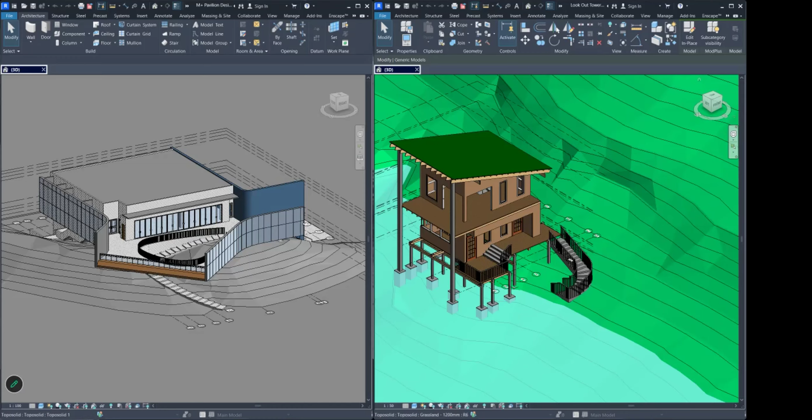We're going to talk a little bit about collaboration in Revit, because this is what we're going to be doing for part 2 of the assignment.

Yeah guys, I'm dealing with some heavy files today. So, what you're looking at here is the Snowdon project that we have been using in our presentation throughout the semester, right? And everybody had chosen a different topic. One of you had gotten the topic of collaboration - one of you had gotten that group. Remember, I told you that was going to be a part of what we do in this module.

Now, when we are collaborating in Revit, the idea with collaboration is that you can be in 3 different locations but work in the same project, right? And you guys that are in groups are going to be in different locations. I mean, we're online now - chances are you won't all be in the same physical space, but we're going to be able to work together.

Now, collaboration is going to be important because you're going to need this next semester. Next semester, when you do computing, you're going to have to work together in a group to do a set of drawings, and you're going to have to work collaboratively. I'm hoping that you guys will be the group that finally works collaboratively actually in Revit.

Because I think because we're all kind of learning Revit, sometimes when we're under the pressure of doing an actual project in Revit, we tend to default back to our old ways of working. So what I'm hoping is that when we learn collaboration, it is something that you not only do to secure your 30% now, but you will do next semester and hopefully when you go off into the working world.

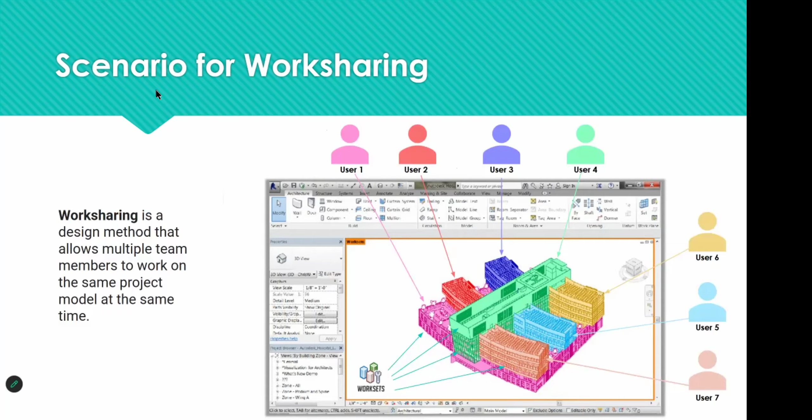Now, with our project, we are going to be using the file linking method. And if you look at the Snowdon project that we've been seeing here, this project is also using file linking. So for example, if you open the architectural part of the project and go to the 3D model, you'll notice that the context, if you click on it, is actually a linked file.

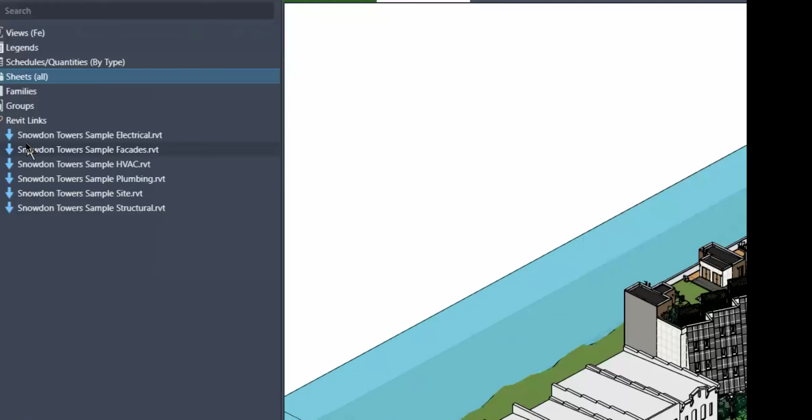So if I go to properties here - sorry, let's go to view - let's turn on the project browser. Let me put the project browser on this side so you can see clearly. So if I click on the context here, my project browser is telling me that I have the file called Snowdon Towers Sample Site linked into my project. So if I choose to unload this link...

...then I will have no context, because the context file is actually a separate Revit file. You can tell because you can see this is a .rvt file. So if I minimize this here, what you notice is that I have my... let's put this over here, and let's close the properties for now. So what you notice is that I have my site file right here.

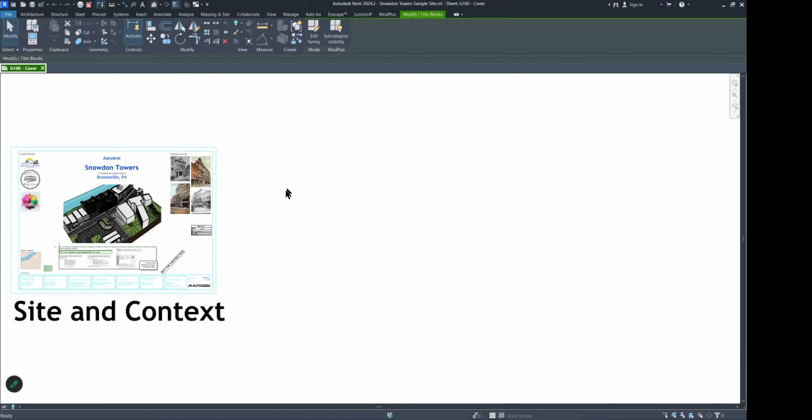So when I open the site file and go to the 3D view, you'll notice that in my site file, I can actually edit these objects.

If you look at my building here, my building is now a linked file in my site file. So the basic idea is that you have multiple Revit files, and then you merge those Revit files together to have one primary file. In this case, the person that lays out the furniture is doing it in their own file, and the person that does the mechanical and electrical is working in their own file.

So this is how we use Revit in the working world. The idea is it can be twofold. You can be in the office and you decide to work on a project together. You might say, alright, Abigail, you take the ground floor, and Okiri, you take the first floor. Both of you have two separate Revit files, but then you merge them together to create that final file.

Now we're going to be doing that, and what we're going to be doing is you're going to be divided into groups of 3. The first group is going to be the designer. The next group is going to be the family modeler, and the lead of the group is going to be the BIM coordinator. Now, how this is going to work is...

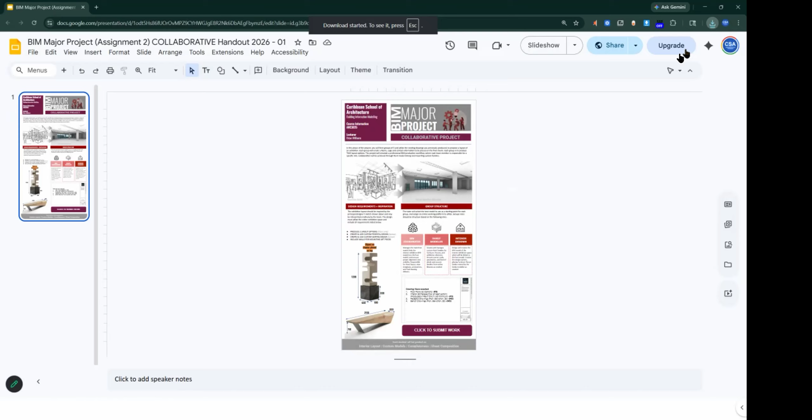Oh, I forget, I can't zoom presentation. Let me download this. There we go. There we go. All right.

Everyone can see my screen. For our collaborative project, you will form groups of 3 and utilize the existing drawings you previously produced to propose a layout of an exhibition. So this is that empty space that you have on the upper floor, right?

Each group will create a name, logo, contact information to be placed on your sheets, just like what you did before. Now, each group is to produce two options for the layout of this space here.

This project is basically simulating what is done in an architectural office when you have to share a project together, right? So each member is responsible for a specific role, and the collaboration is going to be done using file linking. So this is the space that should be on the interior of your model.

Now, I am going to be giving you, every group is going to get a starting model that I have produced. So you're not going to use the models that you created. You're going to use the model that I give you. It's the same M plus pavilion, but you're going to use my version of the model. That way everybody has the same starting point. All right.

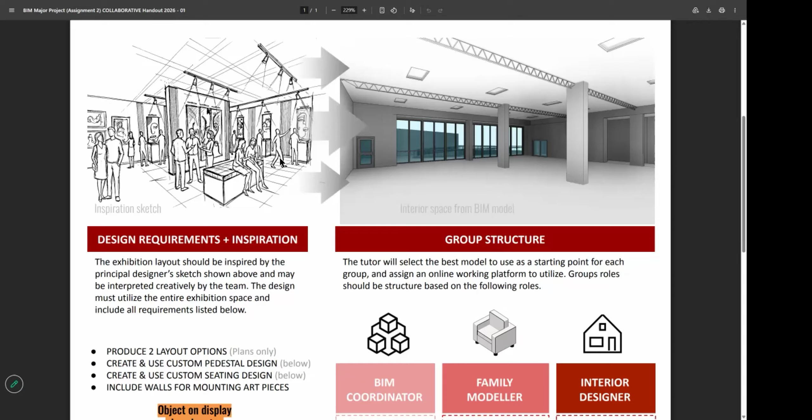Now skip down. There are three group members here, and we spoke about the interior designer. There's going to be somebody designated as the family modeler, meaning the person who will create the pedestal and the bench. The family modeler creates and manages the custom Revit families for furniture used in the exhibition, and ensures that the objects are modeled properly. This is what the pedestal looks like, and this is what the bench looks like. The family modeler is responsible for creating this object.

Now, when the family modeler creates this object, the interior designer is going to distribute the object throughout the floor plan, depending on what the design is.

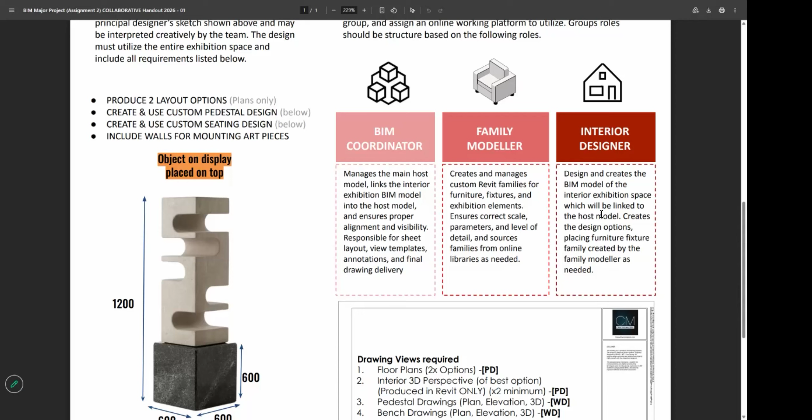The final role is going to be the BIM coordinator. The BIM coordinator is the person responsible for merging the interior designer's drawing into the main model. The BIM coordinator is also going to put them on sheets, add annotations, stuff like that.

You guys following me so far? Yes, thumbs up. Yes, cool. All right, cool.

So for this part of the project, I'm going to give you the model that you're going to use, basically the starting points. I have three folders to distribute: one folder goes to the BIM coordinator, another goes to the family modeler, and the third goes to the interior designer. All three of you are to work in those files that I've given you, so you're not creating your own files from scratch — you're going to use the file that I prepared for you.

Now, when you form a group, you need to store your files somewhere, so you're going to decide where you want to store your files. Go ahead, Gavin.

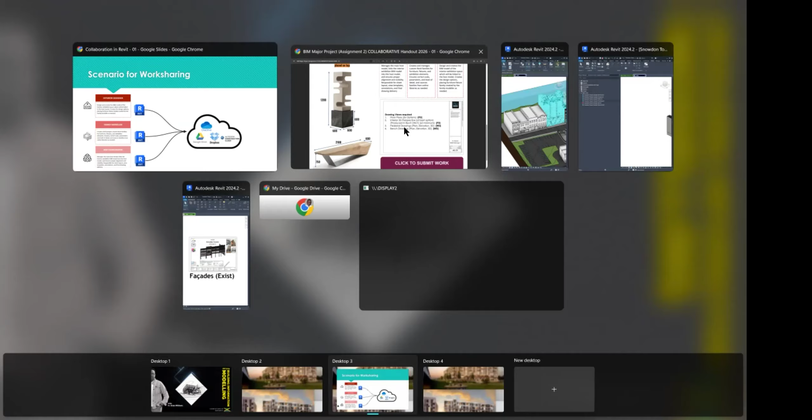Sir, question. Yeah, go ahead. You said we all have to be using the same version of Revit — I remember you mentioning using 2024. Is that the best one to use, or can we all use 26 or 25?

You can all use 26 or 25. I normally recommend 24 because it's the lowest — you can always go from low to high, but you can't go from high to low. So if I recommend 24 and you all use 24, and somebody's using 26, you can go up. But if I recommend 26 and for some reason 26 doesn't work on somebody's computer, you can't go down. So if somebody in your group has 26, then you all have to go up to 26 to be compatible.

Everybody, you're going to have a group grade and an individual grade. So if you look at the responsibilities, the BIM coordinator is going to put the model together and put the sheets together — that's 50% of your grade coming from. The family modeler is the one that's going to build these objects in Revit, so that's what your grade comes from.

The interior designer is going to create two layout options, so everybody is going to have their own Revit file, and you're all submitting your individual Revit files. However, the BIM coordinator's Revit file would be used to grade everybody, because the BIM coordinator is submitting the Revit file that includes everybody else's work and the PDF.

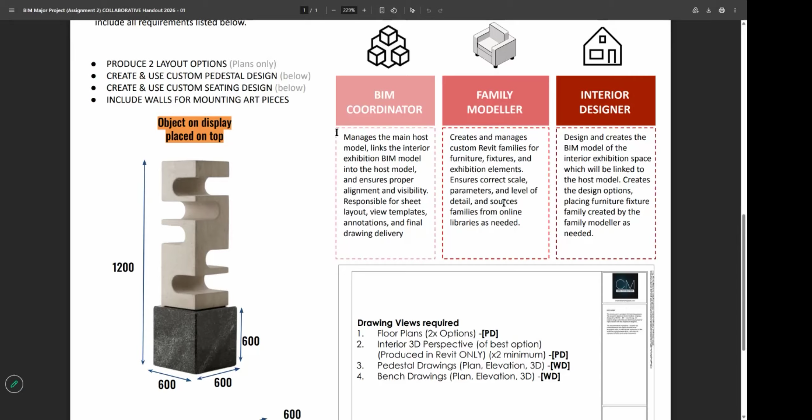Now, I'll be giving you two tutorials today. One of them is going to be on using the design options feature in Revit, and that's going to be especially for the persons doing the interior designer role. And the other tutorial is going to be on using the family editor.

Now, we did do some family modeling last year, right? This time we're going to do pretty much the same thing. Anybody remember what you modeled in the family model last year? Who remembers? What did you create? Anybody remember? No? The bench. Right, you created a bench. This time you're going to create another bench. Can you believe it, Abigail? Another bench. So excited.

Well, guess what the exciting thing is this time? We're going to be making a parametric object. So that is going to be the added thing that we do this semester, right? That means that this bench that we create, when it's in the model, you can adjust the sizing of it, right? Whereas last semester we only modeled it. So that's going to be the task of the family modeler, right? So that is the assignment in a nutshell.

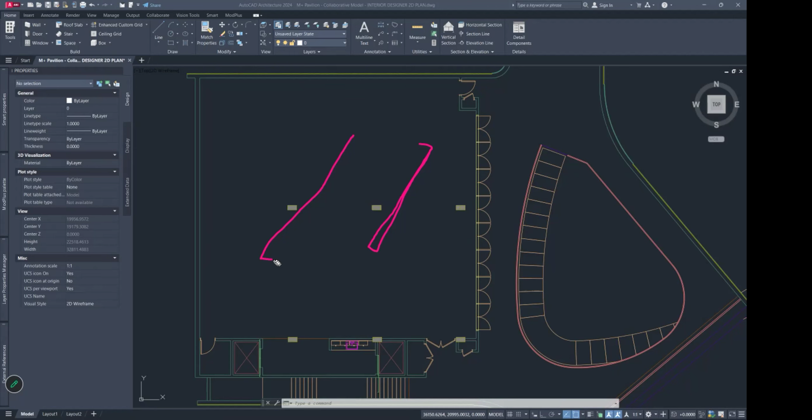You might decide to have a wall here, another wall here, and maybe a wall here, and then maybe pedestals in the middle. It's totally up to you how you want to design this space. Maybe you want to do it angular, like have the walls like this, and then walk through the space that way. Don't overcomplicate it, guys.

It's not about the design—well, yes, I am looking at the design because obviously the design has to work. It's a big empty space, and you have a bunch of art pieces to be displayed. So using that idea, you are architectural students. You can determine if you want pedestals on 4 sides, and then maybe a wall here. Totally up to you.

Now, remember interior design group, the pedestals that you use must be from the family modeler. Meaning, sure, in your design process you can put some boxes, and the boxes represent where the pedestals will be. But when you submit your work to me, in order for the group grade to work, I have to see all three pieces, all three parts come together.

Let's see, still on the designer. If you look in your folder, you're also going to have a Revit file. Now this Revit file is basically empty. Let me open it for you.

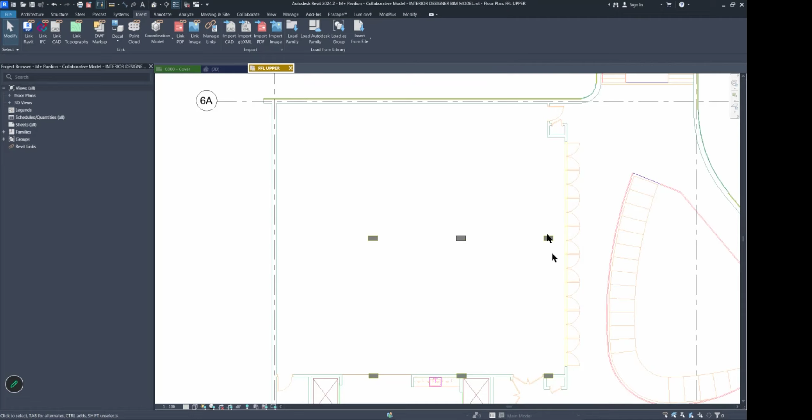If you want, you could also insert the CAD file that I've given you. You can also insert the CAD file—it should drop in place. There you go, and then you'll have the CAD file as a reference, and you can now draw your walls and everything. Now, of course, for the interior designer, there's no need for you to draw all of these exterior walls because they exist already.

So that's it for the interior designer. Now for the family modeler, your files—what you will have in your folder for the family modeler is going to be 2 RFA files. RFA is Revit family files. Now these files are going to be empty, of course, because you are going to create this object. So let me show you what your files look like. Here we go. So when you open these RFA files, they're going to be empty because they're basically just a furniture family file, and the objective now is that you would start to create the furniture in this file.

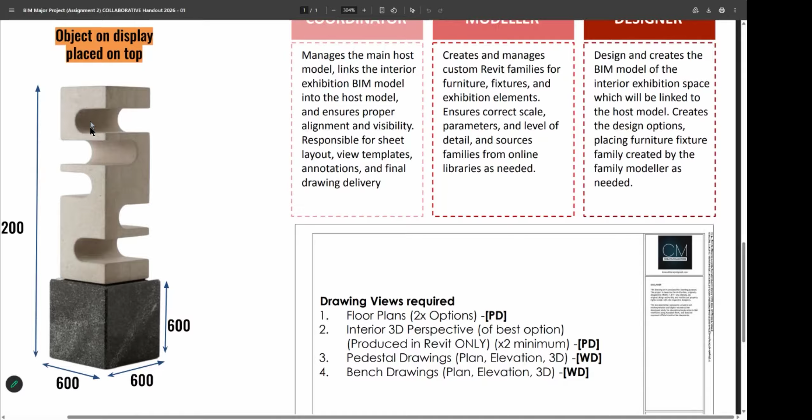Now, the furniture you're going to create is going to be this display. So the idea is that an object would be sitting on top of this and then create this bench here. So you have 2 objects to create. Now I'll give you an idea of how to create this one. This one, I'm going to leave you guys to figure out how you would model this. You know, just so it's not too boring for you.

Right, Joshua? Are you here, Joshua? Yes, sir. All right, cool. Oh, I should have taken questions.

Is there any questions for the interior designer role? So essentially for interior design, all I have to do is just import the AutoCAD and lay it out so that when you link the file, it lays out. Exactly, cool. Any questions for the family modeler? No? All right, cool.

The last role is going to be the BIM coordinator. Now, the BIM coordinator is going to be responsible for putting the model together. So in that folder, the BIM coordinator folder, you're just going to have a file of the project. So if I open this file up here, all you will have is a model of the building. Now, this is going to be a version of the model that I created. There are no sheets, there are no views, there are no elevations, nothing. There's nothing in this file but just the model. That's all there is to it.

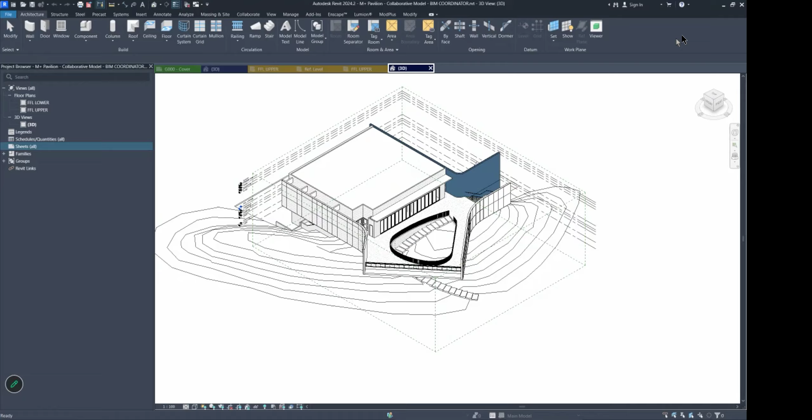And then you're going to create sheets for this interior design. Now, the sheets you're going to create is going to be based on what is on the handout. So keep an eye on the handout.

Where did it go? It's this one. Where did I put it? Man, if I closed it, I think. Right, it's going to be based on the handout. So,

BIM coordinator, you're responsible for giving me drawings for floor plans, 2 interior perspectives, the pedestal drawings, and the bench drawings. Now remember, as the BIM coordinator, you're basically putting the sheets together and putting annotations together. You're not responsible to create the design or create the objects.

Any questions for the BIM coordinator role? So, sir, so only 4 sheets or? Well, is it 4 sheets? However you want to lay it out, because floor plans, maybe 4 plans, maybe 1 will go on each sheet. You're pretty much using the same layout, same scale, everything that you did from the individual project. If you want to put 2 perspective views on 1 sheet, it's totally up to you. All right?

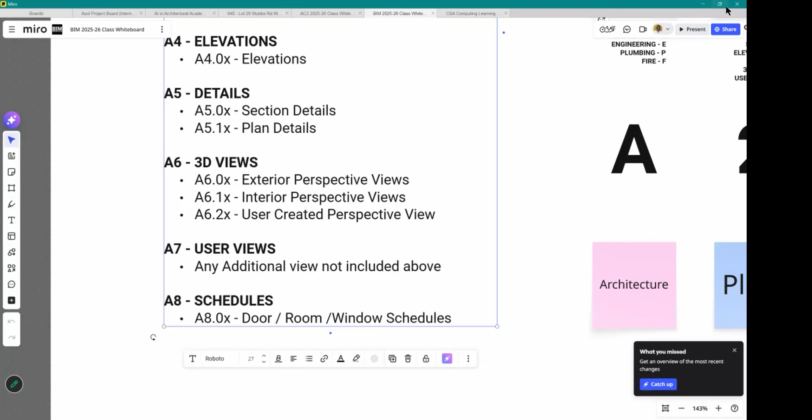So the BIM coordinator, yes, you will be marked individually, but how you put everything together affects the entire group. All right, so you have a little bit more weight on your shoulders. But you know how it is being a group leader. You're not necessarily doing any drawings, but you are putting the drawings, the hard work of your team members together, and delivering it appropriately. Any questions for the BIM coordinator?

Yeah, sir. I'm the BIM coordinator from my group, but I have 2 members already. Or are you choosing the members, or can I choose my members? You choose your own members. Okay, so it's totally up to you. Right, sir. I'm just going to provide the means by which I record the members, right? So we're going to just do it up on a form real quick.

All right. Now, before you guys go and before we do the groups, everybody here should learn about how we do design options and how we do family modeling, right? So just because a person may be doing the interior design, it is for everyone here to learn how to do it. So we're going to go through these 2 tutorials with everyone in the group.

All right. So, and then after the tutorials, I think you'll be a little bit more informed and you'll be like, okay, definitely I want to be the BIM, the family modeler. Or you might be, oh, hell no, I don't want to be the family modeler. I don't know how to use those things as good or whatever. All right, so we're going to take a look on 2 short tutorials.

We're going to do it the OG way, right? We're going to do it in class though, right? We're not going to be doing the whole app submit screenshot way, right? And then you can always refer back to this class recording if you want to view it again. Now, some of you already know this stuff already, right? But some of you don't. So my job is to make sure that everyone knows how. So we're gonna take a look on what do we have? So let's take a look on design options. These are pretty short, guys, like 15 minutes or less, I think. All right, so let's go.

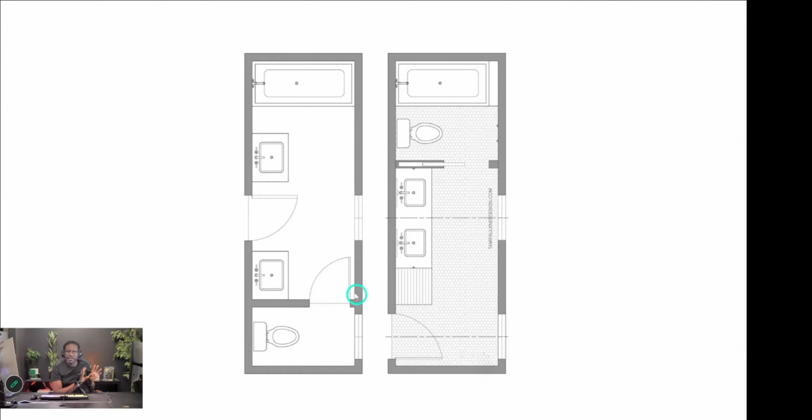Look at this example: we have 2 bathroom layouts. What I want to talk about is a feature in Revit that allows you to efficiently do different designs. Right away, I can tell you the incorrect way to do this is to do 2 separate floor plans side by side so you can see both—that's usually what's done. But when doing design options in BIM, there is a different approach that we use. So we're going to look at that now.

So we're going to head into Revit, and we have the space here that we intend to use. I'm going to bring this up here, and we're going to put this right here. What we're going to do is create the first option. I'm going to draw a wall that's going to be here—this is really simple, so you don't necessarily have to follow along, but you should remember how to do it for when you need it. And let's put in a door—a sliding door, the regular door, 36 inches wide, roughly there.

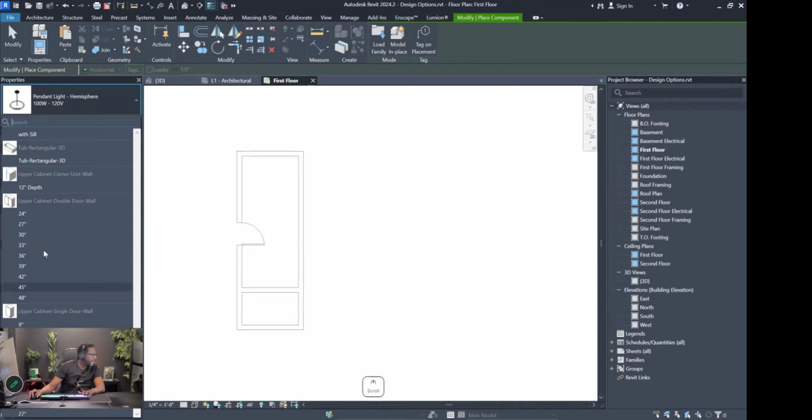Then we're going to put 2 sinks on each side. I'm using the residential template, so most of these things are already built in. I'll represent a sink here and one here, place the water closet there, and then place another door here. Oh, and let's not forget the tub—let's go back to component and place the tub, attached to a wall right about there. Now the tub is bigger, so we can change the width. The length of our room we'll make 7.5 feet, and we'll let the tub be 7.5 feet too—that's quite a big tub, but we just need it for this example. There we go, now the tub lines up exactly with the wall, which is fine just for representation purposes.

Now, let's say we want to create a different option, like what we see here in our plan. As I said, the incorrect way to do this—some of us would maybe duplicate this, copy it over here, and then start making changes, moving the doors so this door is down here and so on. But the idea is that this is not what you actually do.

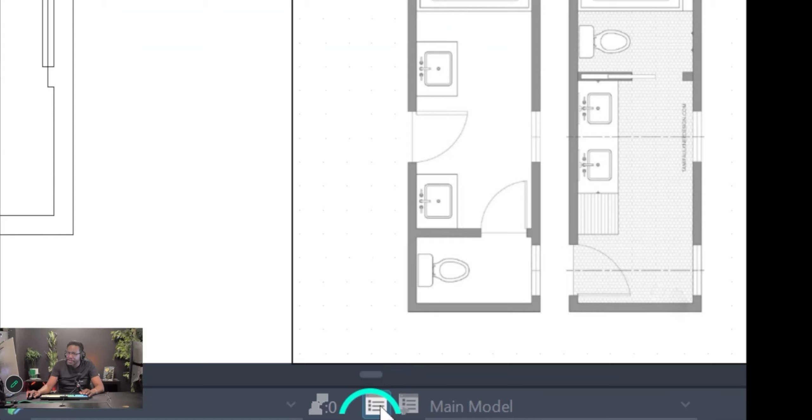In Revit, you have a feature called Design Options, which you find down here on your screen. How Design Options work is, let's say you have more than one design that you want to propose for the same space. What you would do is go to Design Options and say, okay, I want to create a set of designs.

So you create a set, and then you create options for that set. Let's create a new set here, and by default it calls this Option Set 1. You can rename this if you want. I can rename this to Bathroom Options, and this would be Option 1 for my bathroom options. Now Option 1 is my primary, which is what I'm seeing on the screen now.

Let's say I want to create an Option 2. So I'm going to choose New Option, and it's going to create Option 2. Now Option 2 is not the primary. So if I choose OK now, I'm going to choose Close. Now what you see down here is it's displaying the main model, and the main model is going to display the primary option. If I choose Option 2, everything is going to go gray, and I'm not going to see anything really.

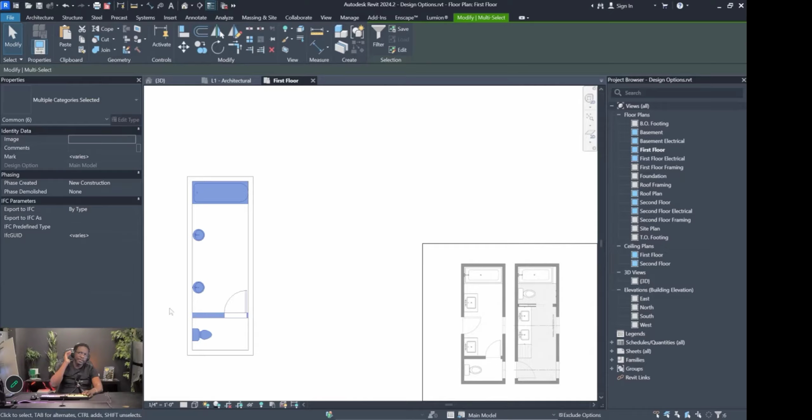Let's remove this door for now, and just speak about the items inside of the bathroom. These two sinks, this tub, this door, this wall here, all of these represent Option 1. So what that means is I need to move them from the base layer. I'm going to cut them, switch my model to Option 1, and then paste them—paste to same place here. So now these are on Option 1.

So if I go to Option 2, I won't see anything because this is Option 1. And if I go to the main model, then I'm going to see Option 1 because Option 1 is my primary option. Okay, so let me give you an example.

If I go to Option 2, I want the tub to be up here. So the tub is still up here in Option 2. However, my water closet is up here, so I'm going to place the water closet here—this is going to be here. Then I have a wall, that's going to be here. So this is Option 2 I'm looking at now.

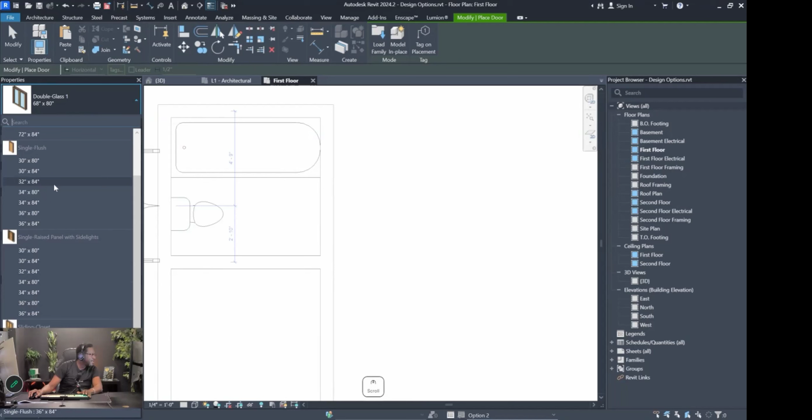And then I have a pocket door. So I'm going to just use a double sliding door. Let me just use a double—actually, I'm just going to use a single door here. Yeah, I'm just going to use this one. You know, this is just a test, not that you'd have these doors actually going into the bathroom.

And then I will have my sinks. So let's say that I have—let me find my base cabinets here. Okay, put a vanity here, another one here. So let's say this is my Option 2.

If I switch to Option 1, the inside will change, and if I switch to Option 2, it will change. If I go to my main model, it's going to show Option 1 because Option 1 is set to primary. So if I go to my Design Options and set Option 2 to primary, then—this is just showing me this error here, a relationship between bathroom options, but that's fine, I'm going to choose Done. So now my main model is showing Option 2. I can switch to Option 1; however, when I print my model, it's going to show me Option 2.

So this is how you do options in Revit, where you show different options by using the Design Options feature.

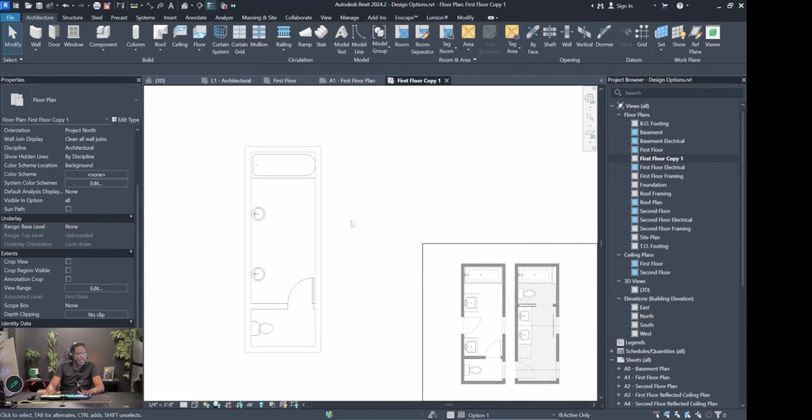Is you would create two plans. So for example, right now I have this that says first floor. I'm going to say first floor Option 1. Then I'm going to duplicate this plan and say first floor Option 2. Now I have one with Option 1 and one with Option 2. Right now, both of them are showing me the same options.

If I go to option 1, choose option 1 here, and go to option 2 and choose option 2, it doesn't keep it. This setting here changes it for the entire project.

So how you would go about doing this is you would have to use your visibility settings. What you would do is go into your view template, and let's say we want to use the view template architectural plan. So let's choose OK. So this is architectural plan here.

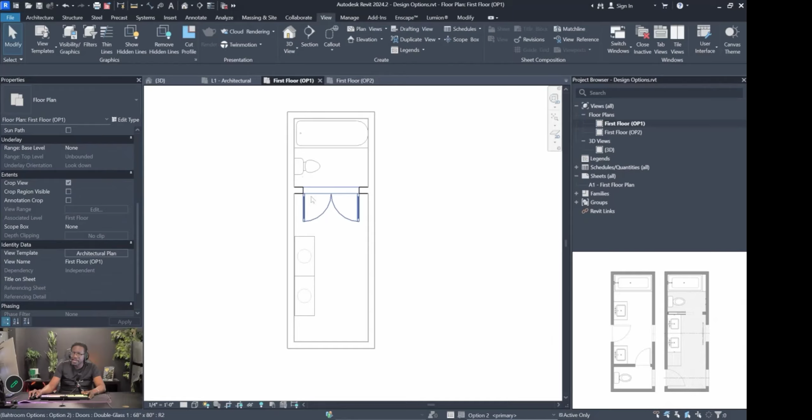So what we would do is duplicate this and just say option 1. So we created a new view template called option 1. And let's duplicate this again and call this option 2.

In the option 1 view template, we would go over to model settings, then to design options, and say for option 1 we want to show option 1. Then we go to option 2 and say for option 2, go to design options and say we want to show option 2, which is okay.

Now this drawing here is option 1 that we're in, so we're going to put it on option 1 and choose okay, and it will show us option 1. Then we go to option 2 floor plan, and we go to the view template and choose option 2. So now option 1 is showing option 1 and option 2 is showing option 2.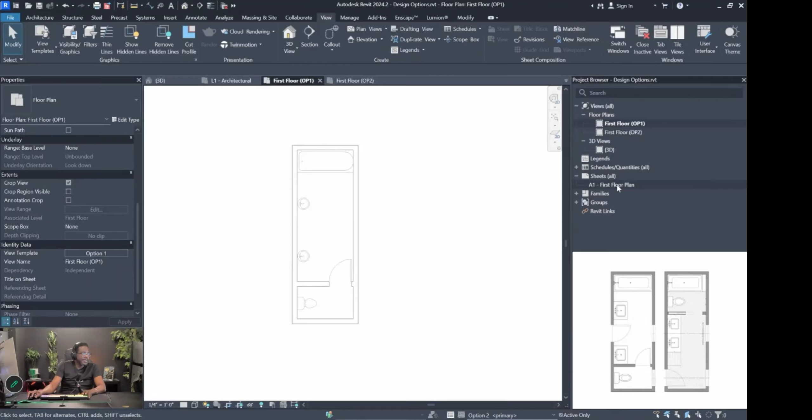The idea is we would put these two views on a sheet floor plan. So when we go to the sheet, we drag option 1 onto our floor plan, and then we drag option 2 onto our floor plan as well. Right now we are showing both options on the same drawing, and the great thing is that they are linked to the same drawing.

For example, if I went into my drawing, let's say I went to the first floor here, I'm going to go into my main model, and let's say I added a window. Now these windows that I'm adding are being added to the main model, not to option 1 or option 2. So what that means is that in both options I will see these windows.

Now it was giving me an error because I added the window where the wall is here, but the objective is that this is the efficient way to show design options in Revit. You create an option set, then you create different options for that option set, and you work within the option set.

Think of it like layers. Option 1 is a layer. You work within option 1. Anything you create in option 1 only is available when you switch to option 1. This makes it very efficient to show multiple design options using the same BIM model.

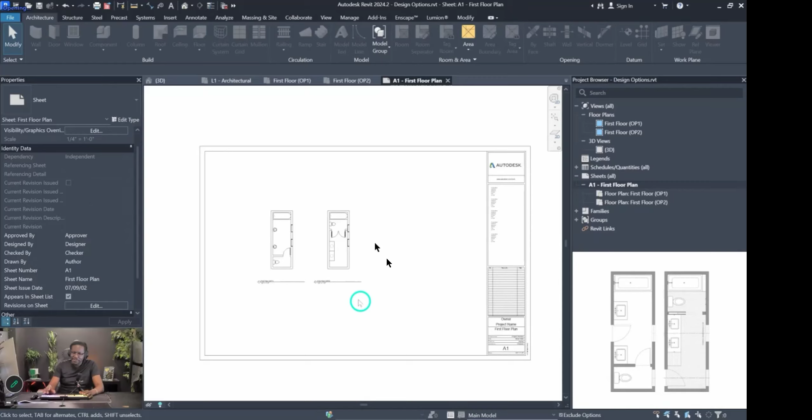So we're going to take a look at how we would go about building this furniture. Now in Revit, when we're building furniture, we build them as families. The idea is that Revit's workflow really works by, when you create these families, you insert them into your BIM model. So the families are actually separate from the BIM model. You create them and then you insert them in the BIM model.

When you really think about it, Revit is actually made up of two programs kind of merged together, and we call them modeling environments. Revit is divided into two modeling environments: there's the project modeling environment, where you build your building, and there's the family modeling environment, where you create objects to then insert into your BIM model.

In order to create objects, and these objects range from furniture to equipment to electronic equipment, communication equipment, whatever elements you intend to insert in your BIM model, you will need to create them in the family modeling environment. Now, the family modeling environment is subdivided into three modes: the family modeling environment, the conceptual mass modeling environment, and the in-place modeling environment.

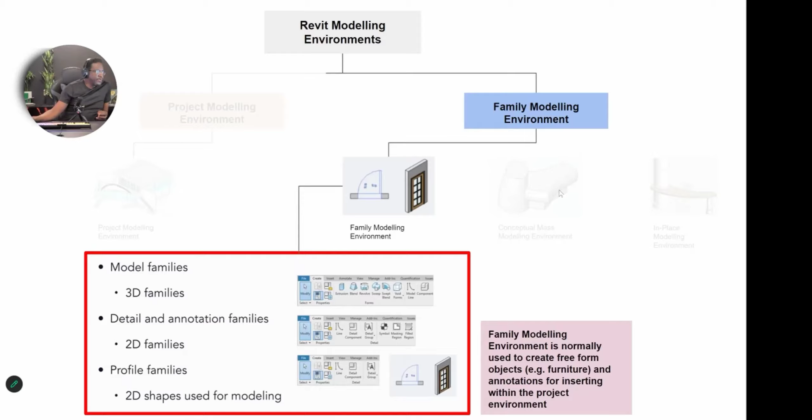They're used for different things. The main one is the family modeling environment, and that is used to create pretty much any object that you intend to put into Revit. This would involve everything relating to furniture and equipment. You use the family modeling environment to do this.

The conceptual mass modeling environment is normally used for building out conceptual models, usually done at the pre-design phase of a project. Different persons use different software and tools to do this. Some go old school with pen and paper and sketch their ideas. Some would use Google SketchUp to model their conceptual ideas. But Revit also provides you with a built-in way to conceptualize your ideas, using the conceptual mass modeling environment.

The last one is the in-place modeling environment, and this one is, I'd call it, a kind of quick and dirty way to create models. The reason I say that is you do not have to build this model in a separate file and then insert it in your project. The in-place modeling allows you to model within the environment. It's usually for when you want to make very unique elements, sometimes elements that do not repeat.

For example, if you were to create a table or a chair that will repeat throughout the whole project, you would not use the model-in-place environment. But let's say you wanted to create a small covering for a part of your model—like a unique corner you want to cover with a special type of design that you're only going to use once. That's when you would go into the in-place modeling environment. It's used as a kind of band-aid modeling—once an object is not going to be mass distributed, you would use the in-place modeling.

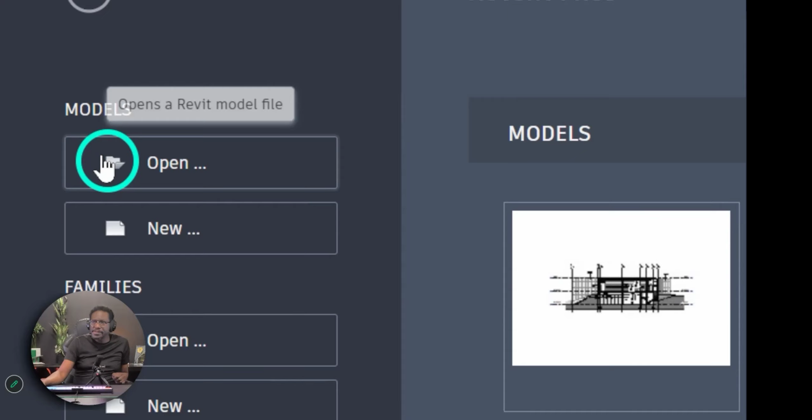Now, normally when you go into Revit, you notice these two headings here: Models and Families, and this is where you go into the different modes for using Revit. Models is where you go into the project modeling mode, and this is where you go to create your building. Under Families, this is where you go to create a new family.

So you would go to Families to create either an object in the family modeling environment or to create a conceptual mass. The model-in-place is not accessed from this menu here because, remember, the model-in-place is done within the project modeling environment.

So if we want to create an object that we intend to use throughout our projects—maybe even distribute it to the rest of our team members, creating a standard object used across many projects—then the best way to do that is to use the family modeling environment. This means when you go to Revit, you would need to go under Families, then go to New, to create a new family.

In our case, we want to create this unique bench, and the idea is that when we create it, we're going to place it in our model and distribute it. Because it's going to be used for distribution, we're going to use the family modeling environment. So we're going to go over to Revit, go to Families, and then go to New. Once you do that, you'll notice you're brought to this folder where you have a list of different family modeling templates.

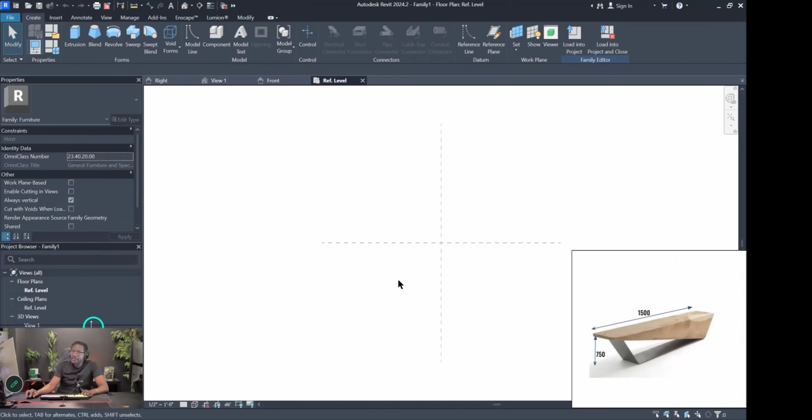Now, once you do that, you'll notice the template is now open, and it's going to look pretty much blank for now. Your family modeling environment looks a little different than the project modeling environment. Notice that at the top here, we have Create, Insert, Annotate - so our menus are a bit different.

Now, just to show you a comparison - if I was going to create a BIM model, I would go to Models and say create a new BIM model, and I'm just going to choose the default metric multidiscipline here. All right, there we go. So now I'm in my project, and I'm going to put this side by side. This would be my project environment here, and this would be my family modeling environment here.

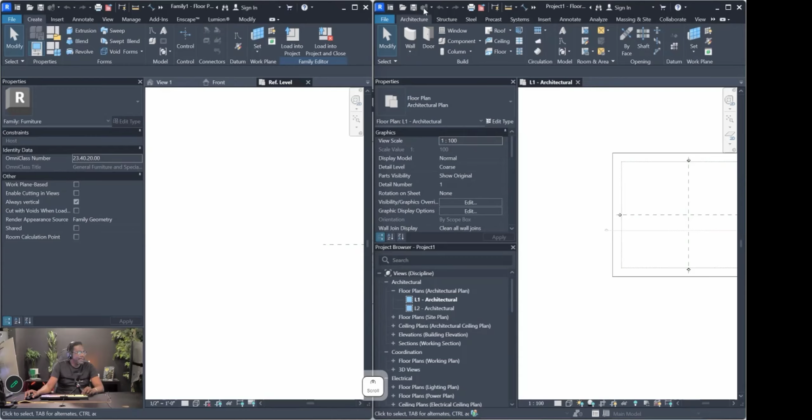Now, as I'm saying, Revit is basically divided into two modes. In the project modeling environment that you have here, for example, if I go to 3D here, I can draw a wall. I can do things like put in a door, put in windows - everything that you can do in your project modeling environment. Now, in your family modeling environment, firstly, notice there is no architecture tab at the top, right? So it's not made for you to do walls and windows and doors.

So for example, if I go to my 3D view here, it looks a lot different. Your tools in the family modeling environment are, for example, like extrude. So let's say I wanted to create a box - there's my box there, I'll choose OK, and I'm able to extrude the box. So this is an object that is in the family modeling environment. But on this side, we have architectural tools that are in the project modeling environment. The idea is that you create your objects here and then you insert them into this environment. So these are the two different modes that Revit has.

So if I was in the project modeling environment and wanted to create a custom shape that's not part of the architectural tools, I would need to first go into the family modeling environment, where I have tools such as extrude, revolve, and sweep. All of these tools allow me to model anything. Once I've modeled it, I insert it back into the project. That is really how Revit is meant for you to use the modeling environment.

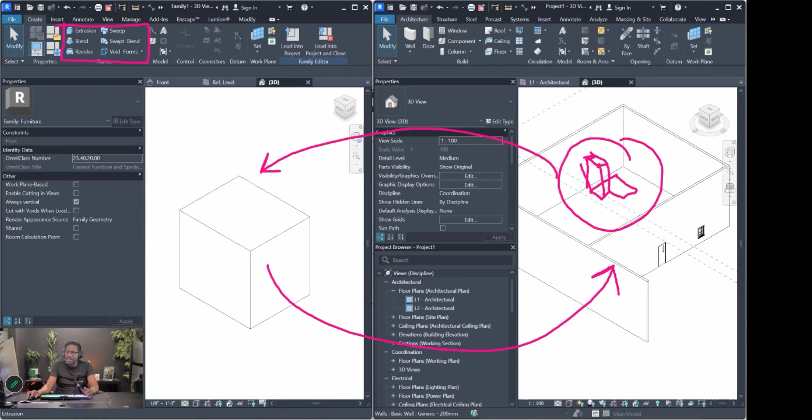Once it's here, I can duplicate this custom object many times, and all of them are linked to the same model. Now that we understand how that works, let's go back to our environment here. I will delete this box that's here. Now let's look back at this bench that we have.

When you're creating an object in the Revit family environment, think of it as using a modeling program, maybe like SketchUp, but with the additional ability to be parametric, meaning you can set up your model to change the height, width, and all of these options.

In the project modeling environment, if I click on this door, I can change the width of the door. Maybe I want it to be 900 millimeters, and then I'm able to change it. This door was created in the family modeling environment, built in a way to allow you to change parameters while in the project environment.

That is the difference when you create a model in Revit's family modeler—you're able to manipulate the model if you create it that way. On the flip side, if you inserted an object from SketchUp or some external source, you wouldn't be able to change things like height or width. That is the advantage of using the family modeling environment to create your objects.

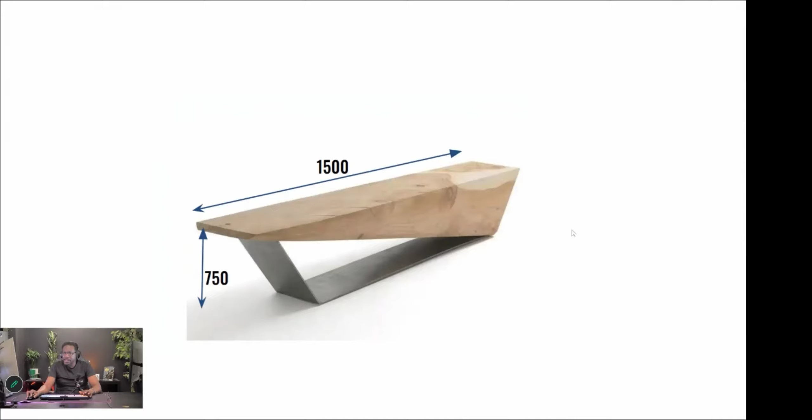So let's take a look at this object here. We have an overall measurement, and some measurements we'll probably need to estimate. If I was to create a strategy for making this object, I could look at this shape, and if I just think about that shape, then I could draw it.

Then I just extrude it this way, and I'd end up with a shape like that. For the bottom of the bench, I could draw another shape like that and extrude it that way again. This is how I could model this shape in the family modeling environment, and it would roughly end up matching the shape we have here. So now we have a game plan for creating this shape.

When you're in the family modeling environment, notice on your project browser—let me pull this out so we can see it. You also have a project browser in your family model environment, but it doesn't have things like sheets and schedules. It's meant for you to change your different views. Right now I'm in the 3D view, and I'm going to mount this on this side like that, so we'll have our project browser for our family here.

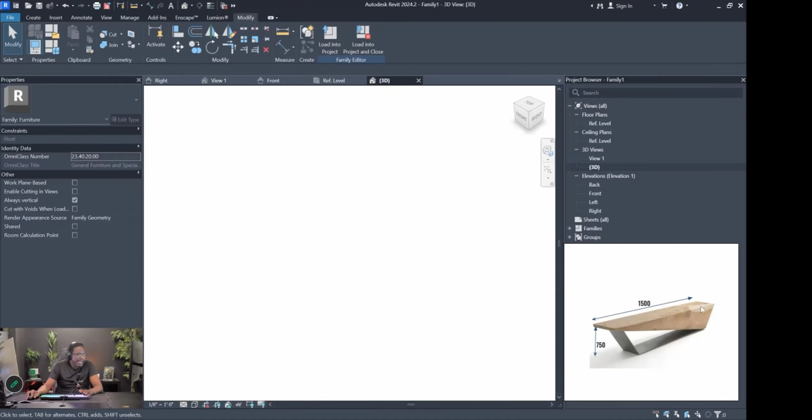Now, looking at this object, we have an idea of this shape, and our game plan was to draw it out first. If we're going to extrude this left to right, we need to draw this shape in our XZ axis. What do I mean by that? Well, I'm in the 3D view here now, right?

And if I think about my axis here, so this is my Z axis, and let's say this is my X and this is my Y here.

Now, the reason I'm saying this is that would mean that you would need to change your drawing plane to be X and Z, so that when you draw your shape here, then you can extrude it in the Y. So if you notice how that relates to our view cube here.

For example, if we were to draw the shape flat on the ground, so let's say like this, so we're now drawing in this face, then that would mean we would extrude it up on the Z, right? So it matters which drawing plane you're in in your family editor.

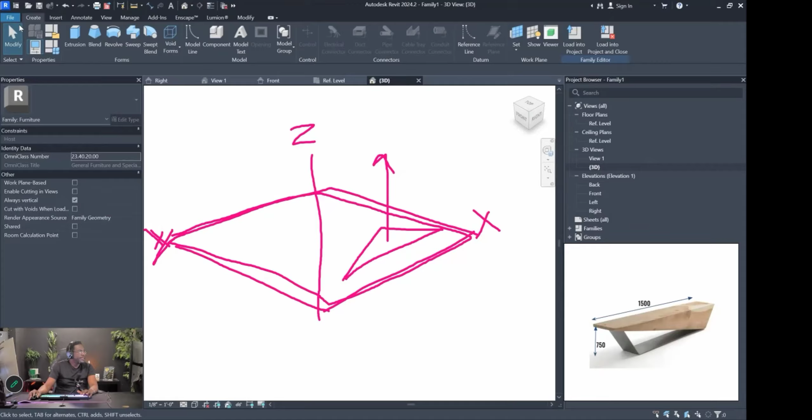And the way you choose your drawing planes is, under the create menu, notice you see a set plane here, just like in the project modeling environment. So you need to change what plane you're in, because that will determine how the object will extrude or be manipulated, right?

So right now, under my create menu, if I go to show my plane, this is where my plane is. So if I orbit this, notice you can look at my view cube here in the top right corner. This plane is pretty much flat.

So if I choose to draw a shape here, if I go to extrude and I choose to draw, I'm just going to draw a random shape here like that and choose OK, then I will be extruding up on the Z axis, as you can see here based on the view cube. And that's because my drawing plane is on the ground.

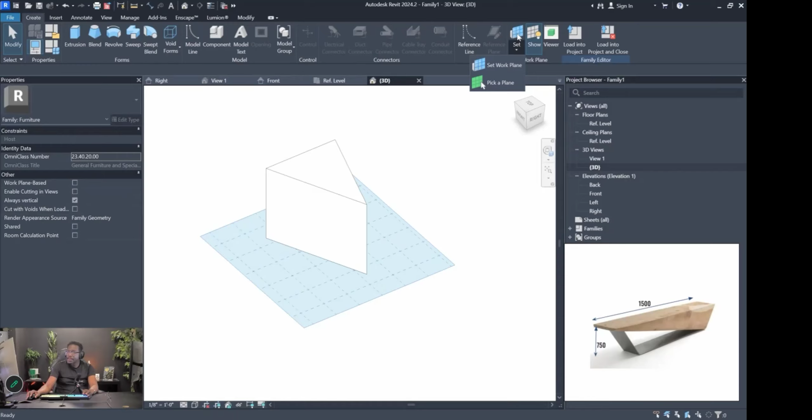Now, if I go back to create here and I go to set, and I click the little down arrow here, I can go to pick a plane or set a plane. So I'm going to go to set a plane here.

And let's say that I want to change my drawing plane. So I want to change it from a base level to, let's say, front back. Notice that my drawing plane will be here now. So I choose OK. If you look in reference to my object, my drawing plane is now on the front.

So now if I wanted to extrude a shape, I go to create and create a shape. This time I'm going to create a rectangle. It's going to be created like this. So if I choose OK, then I'm going to extrude this way.

And that would mean the base of my object would be here. For this object, the base was here. That's how I was able to extrude it up. So when you're in the family editor, what you need to do is actually be able to manipulate your plane, your work plane.

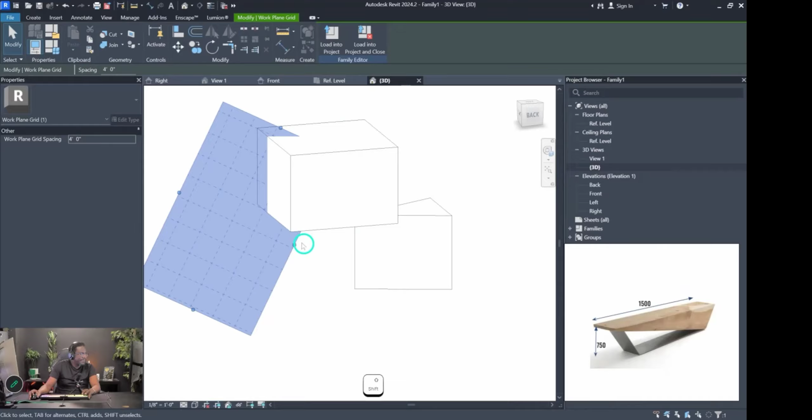Now, the other interesting thing about work planes is that I could go back to set plane, and this time I can go to pick a plane, and I can actually pick a plane on an existing object. So if I pick this plane here, then now the work plane is on this surface. Even though it's not previewing there, because I can extend this, you can see that the work plane is on this surface.

So now if I wanted to create an object, let's create another box. Now when I extrude, it's going to be extruded based on this plane.

Now, as you also notice, the plane was kind of lean, and my work plane is almost like an object that I can manipulate. So for example, I could just go to rotate here, and I could simply rotate my work plane, just like how I would rotate any object.

So I would put my marker here, for example, and I could rotate my object like that. So now if I draw a shape like that, it will be extruded based on this work plane.

So that is the foundation of how you work in the family editor. It is meant for you to be modeling using shapes and work planes, which is a little different than if you were in the project modeling environment.

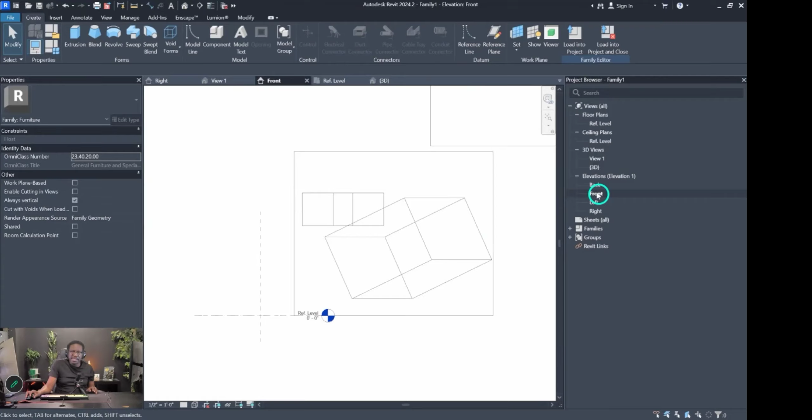Now, this is my 3D view here, and in my 3D view, I'm able to do things like manipulate my work plane. But I also have my different views that I have here. So for example, if I was to go to a front view, then what this means is that my work plane is automatically where I'm facing, meaning I'm not able to, for example, extrude something from top to bottom if my view is set to front. So on this front plane, the reason why you have these here is that you're able to now be a little bit more accurate than if you were in a 3D view.

So for example, I can go here and I can say extrusion again, and I'm going to draw another shape. Now in this view, it's almost like I'm drawing on a plan. Of course, I'm in a front view, plan would be more top. So this would kind of be more like an elevation. But once I'm in this view and I've drawn this like this and I choose OK, now, if I want to extrude the height of this, I'm not able to pull and push it because I'm looking dead on the front of this object.

So I can do that using my properties panel where I can set my extrusion start and extrusion end. Or I could just switch to my 3D view and there is my object right here and I can extrude it as well.

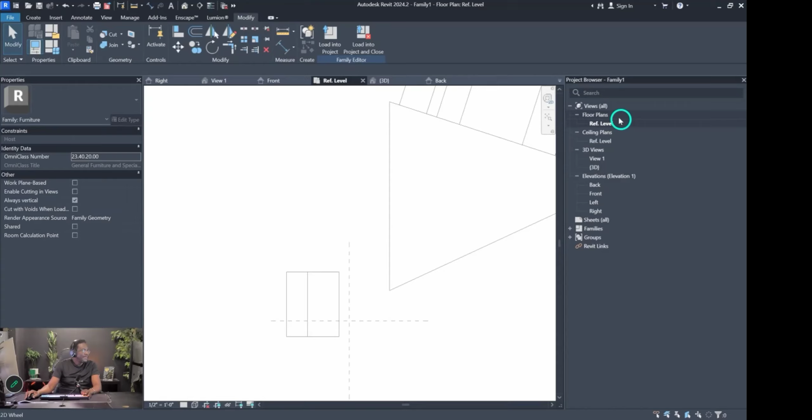So the other way that I can draw in the family editor is that I can draw in these individual views. So for example, if I wanted to draw top down, I would go into my floor plan view. So this is me looking top down, and I can also go left to right and so forth. If I wanted to have a kind of angled view, then what I would do is go to my 3D view, and then I can always use the picker work plane, and then I'm now able to change what my work plane is. But note, once I go into one of these views, my work plane is going to be automatically set to that view.

So now that we kind of understand how this works, I'm going to remove these objects here. And in my 3D view, I'm going to set my work plane. I'm going to set it to my level view. So what's going to happen is, when the work plane is set to your level, this is pretty much like a plan view, top down. So if I wanted to model this, I could go in, for example, let's say a front view here. And then what I'll be doing is that I will treat this here as my front. So translated here, I would probably draw this object something like that, and I'm drawing it in my front view. So then I can switch to a 3D view and extrude it if I want. So this will be how I choose to tackle this.

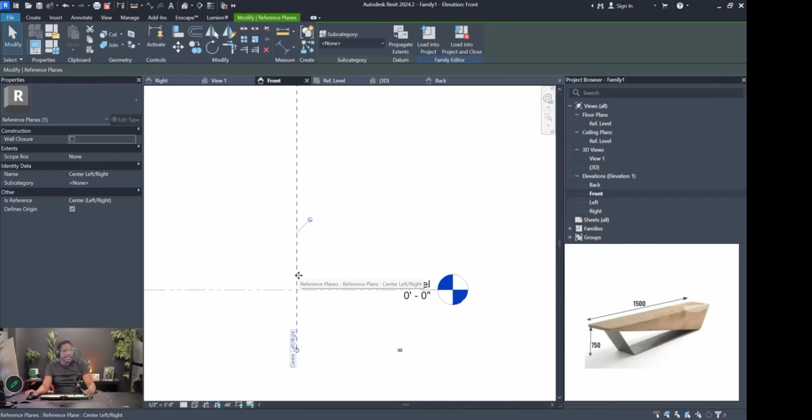So what I'm going to do is notice that when you go in your specific views, you get a reference plane and you also get a reference line. And this is why you would use these views and not necessarily a 3D view to start your model. When I'm in the floor plan view, I get this reference line here. So it gives me a center point for me to anchor my model. And when I'm in 3D view, I don't get this reference plane.

So the idea of the family model is that you're not trying to create photorealistic models. You're mainly trying to create a BIM model to represent what the actual model is going to be. So if we were in a more high-end program that is specifically for modeling photorealistic objects, say like 3D Studio Max or Maya, the focus is not on representing objects to put in your architectural drawings. That focus would be to create highly detailed photorealistic models. In our family modeling environment, the objective is to create a simplified representation of our model because we're going to put it in architectural drawings. So it doesn't require that photorealistic approach where you zoom into the tiny details to model. So keep that in mind whenever you're making your Revit family models. It is really a representation of the model. So with that said, if we look on this model here, there are little things like breaks in the wood.

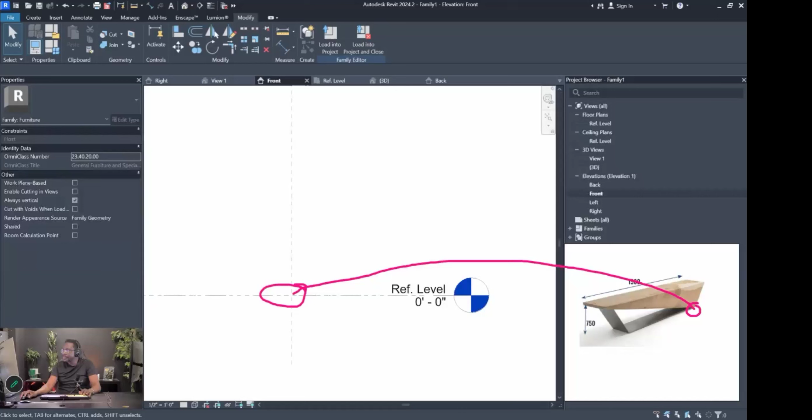So now, when you're in the family editor, I have determined that I want to use an extrusion. I could go to extrusion and just start to draw this out, like that, and start to draw out my extrusion. Then of course I would need to make sure these dimensions are correct - the length here should be 1,500 and so forth.

But usually when you're in the family editor, what you want to do is set up construction or guidelines before you actually start modeling. Because remember, the objective of the family editor is to accurately represent the furniture. So rather than just drawing a shape and extruding it, I'd recommend using reference lines or reference planes to give you a guideline for how to draw your model. I'll give you an example.

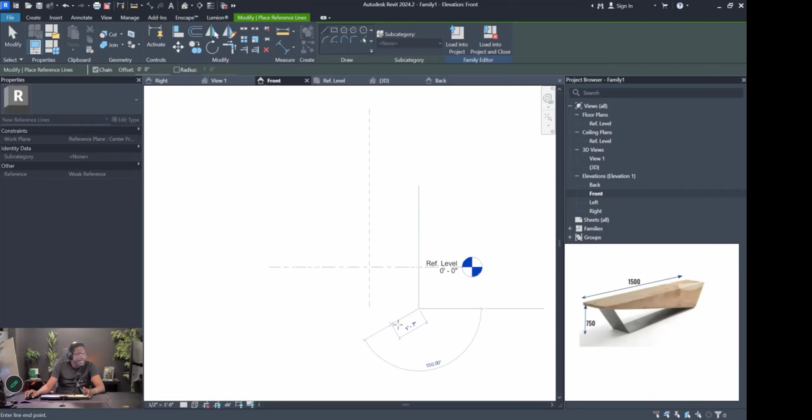Now, currently in the object we have here, we know that this is 1,500. So I'm going to draw a reference line here. A reference plane is just like a guideline - it's not an actual object that exists in your scene. This line here represents one end of the bench. Then I'm going to copy this, using a reference plane, over here, and say 1,500 millimeters.

Now, one thing to notice is that when I created my family file - let me go back and show you - when I chose new, and when I created my family and selected furniture, I am currently in the English Imperial folder. This is why, modeling here in this view, most of my dimensions are in feet and inches. I could also do this in metric, but then I would need to go into the metric version.

Not that it really matters, because you can actually type in imperial or metric measurements. But where it does matter is that when you insert it into your project: if you created it in an imperial family modeling environment, then that furniture's parameters and properties will all be based on imperial.

So because we are doing this drawing in metric, I'm going to close this file without saving, and go back again to create a new family file. But this time I'm going to go to English - you'll see English Imperial and English. English means metric, and English Imperial is feet and inches. So I'll go here to furniture again, and choose open.

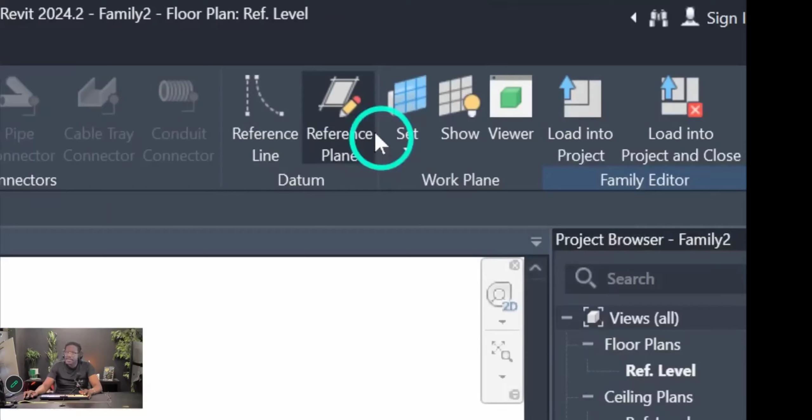It's going to look the exact same way, but the difference is - let me go for my reference plane again - when I draw this, notice that it's going to be in millimeters. Now, something you can also recognize is that you have reference plane and reference line, and both of them are referencing objects, meaning that this line you're drawing doesn't really exist. It's just there as a kind of guideline.

Previously I was using a reference line. So if you draw a reference line, this is what it looks like - it's usually a straight line. And if I draw a reference plane, this is what it looks like. The reference plane is dashed.

Now you'll notice that these lines you see here, already in your template, those are reference planes. If you click on them, you'll notice that they're actually pinned, so if I try to delete it, it won't delete. The objective of that is that it tells you where the center of your drawing is. So the idea is that you don't delete these reference planes.

Now, reference lines work similar, but they have additional features that you would use whenever you're setting up your parameters. Parameters, for example, is what I showed you earlier when I'm able to change the width of a door, or change the height of a door when I'm in the project environment. You use reference planes and reference lines to set up those parameters.

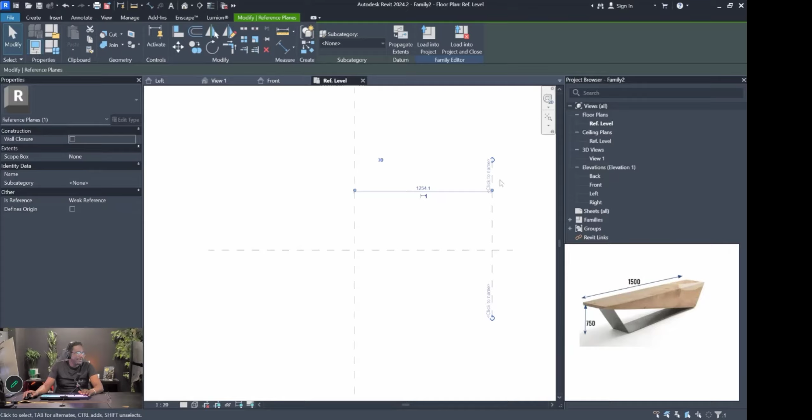Now, in our case, we're going to be using a reference plane. Notice with reference planes, you can even name them. So I'm going to put a reference plane here, and that is going to represent this side of my object. And then I'm going to copy it 1,500 millimeters here, so now this is the full length of my bench.

Now I also want the height. My reference level, this is my floor plan, so I'm actually looking top down on the bench. But remember, the idea is that I want to be in my front view, because my intention is that I want this here to be my front view. So I need to go into my front view and then draw my bench like that. If I go into my plan view and draw my bench, then the bench will be turned on its side.

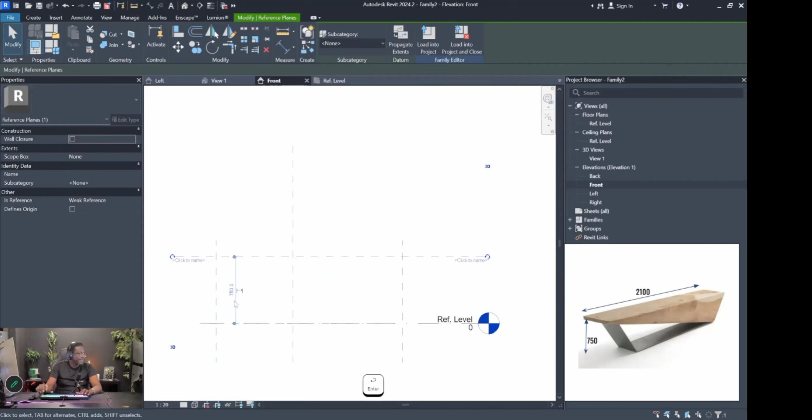Let me go back to my front view here, and I'm going to go to reference plane. I'm going to put my first line here, and I know my next line needs to be 2100, so I'm going to copy that over 2100. There we go. Then I know I want it to be 750 in terms of the height, so I'm going to go to reference plane again, draw this, and set it to 750. So the idea is that I've drawn a reference plane at this point, one at this point, and one here, and my reference level is going to be here.

So when I translate that here, my bench would roughly sit something like that. This is the reason why you draw reference planes, because it helps you to formulate how you're going to create your model. And this is how I chose to do it.

Now, there's something interesting here. If I go to my 3D view, notice that I'm not seeing anything, which is fine, and the reason you're not seeing anything is because reference planes, they don't exist — they're not a three-dimensional object. So let's go back to our front view here.

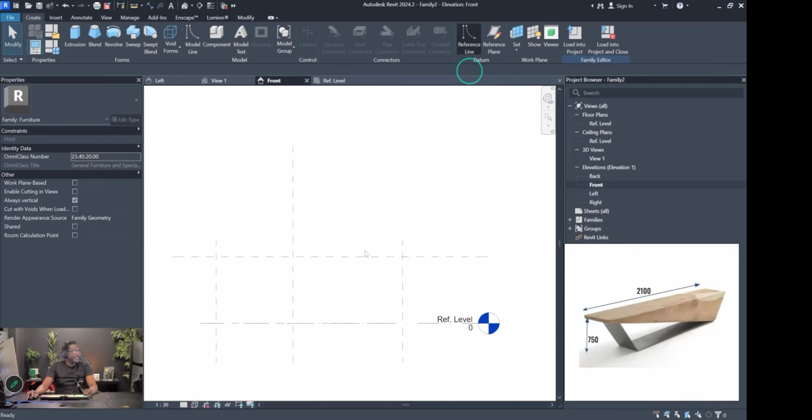Now we need to determine what this slope will be. So what I would do is use a reference plane and draw something. Let's go back here, reference plane — I want to use a reference plane and draw this like that, and draw this like that, so I know that this is what my object would be. And then maybe I want this to come down a little bit more, so I could go to create reference plane, carry this about here, and then draw another one like this.

So usually when you're modeling, what you're trying to do is, before you invest in creating the extrusion, you create guidelines to determine whether this is the way you want your model to look. One reason we're doing that is because we don't have all the measurements for this model — some measurements we're actually estimating. So I feel comfortable using a kind of guideline to first hash out how my model will be drawn.

All right, so now that I have this, I can go to create and go to extrusion, and I'll just trace these lines here like that, and choose OK. Now if I look in 3D view, I will start to see my object. I'm just going to choose view extents — so here's my object.

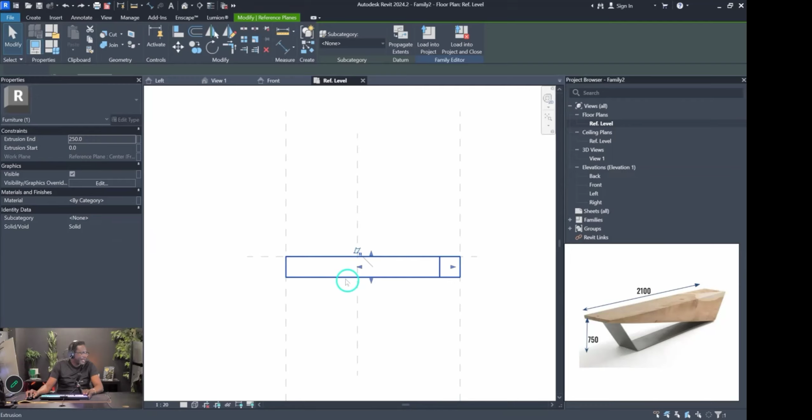Now, what I can do is adjust my extrusion length, which is this. As I move this, keep an eye on the extrusion start and extrusion end. So if I go this way, this is my extrusion end. If I look at my plan view here, you can see that this line and this line are my original lines, so I can extend this like this, or I could actually put in the thickness — how thick this is going to be.

Based on our drawing, this should be 600 millimeters wide. So I'll just go here and say 600, enter, and that's going to be 600 there. So this is the plan view, this is my front view here, and then my 3D view is going to be this.

All right, so I have this basic shape. Now I need to do this bottom part that's going to be here. So I'm going to go back to my front view like that, and for this, I'll just go straight to extrusion.

I'm going to take a piece down like this and across like this. Notice that this is showing the lines thick. I can always turn on my thin lines so you see the thin version, but sometimes if I want to see the lines clearly, I will use the thick lines. So there we go.

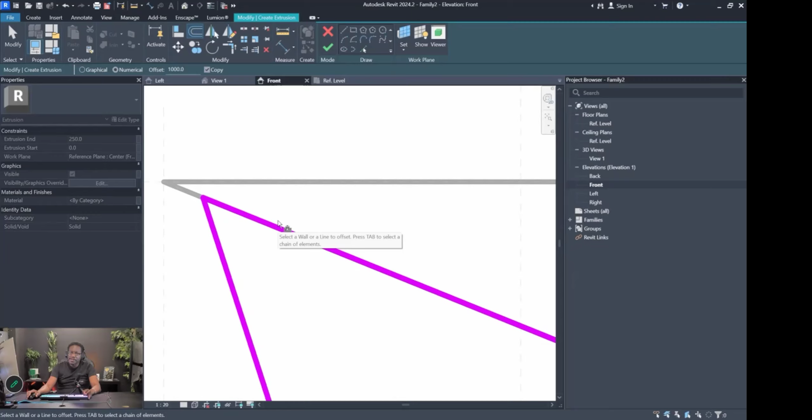Then I'm going to draw one up like this, and I'm actually going to use my offset tool here. The thickness that I want to make this is going to be about 15 millimeters. I'm going to go 15, so my offset is 15. So there I go, I have an offset there. So this is going to be my shape here, and I'm going to choose OK.

Now if I look at this in 3D, and I'll just turn off thickness so you can see it, you'll see this is what I'm seeing here. Now, based on my sketch, this is about somewhere in the center of my shape here, so I would need to adjust my start and end extrusion, something like that.

But to get it accurate, I will go to my reference plane. Then I'll take a reference plane, and I can just copy this reference plane, so I'm going to go to CO. I'm going to copy this and make this about 70 millimeters offset. Then I'm going to go and create another reference plane about here, and offset that the same 70 millimeters.

So now what I'll do is adjust this to land here. So when I look in my 3D view, this is what I will see. Notice I don't see my reference planes, but I see my 3D object.

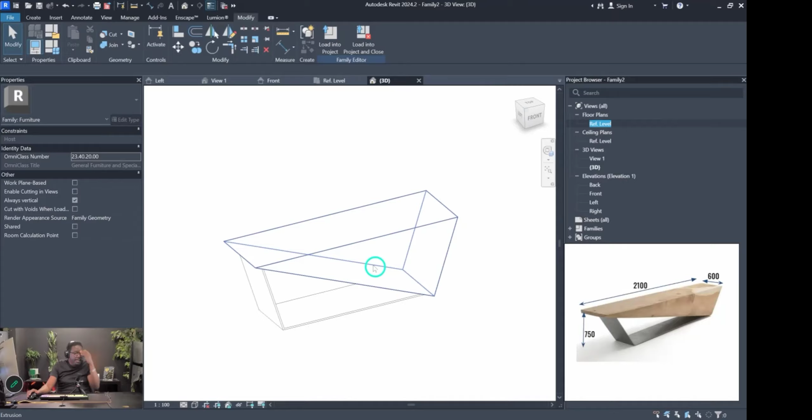So now that I've finished modeling my object, I can now save it. I can go to File, then Save As, and save it as a family file. In this case, I'm going to just save it on my desktop and call it bench. It's there, all right, great.

Now, if I go back to my project file here, remember this is my project file. I'll just make these walls not so tall, so I will make them to level 2. There we go, and I will just trim this like that. Now let's say this was my project, I could now insert that into my project.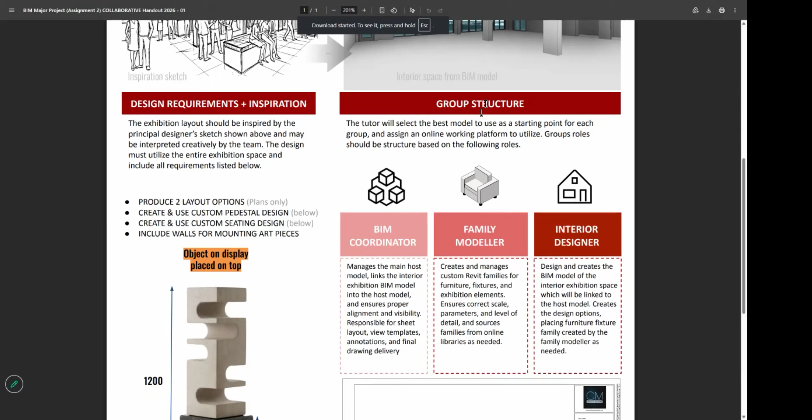Now the other way I can load this into my project, the family object that I just created, is when I'm in my project, I can go to File and then go to Open.

I have it open in the same Revit window. When I'm in my family, I can choose this option to load into project, or load into project and close. If I choose load into project, it will be loaded into the project. So now when I go to component, I'll see that bench already loaded into my project.

So those are the 2 ways that you can get the family object into your project. You can load it by going to load family, or you could open both of them. You could open your family in your project window, and then from your family editor, you choose load into project. It does the same thing.

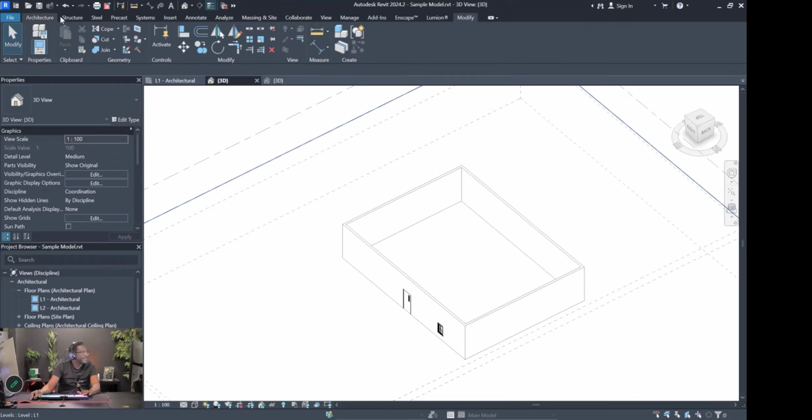Now that I'm into my project here, let's say I have a couple of these benches loaded into my project, like that. The other major advantage of creating an object with a family editor is that you're able to edit the object. Let me give you an example.

Right now, if I wanted to change the width of my object here, I would have to go back to my family editor. Then I'd have to change the size of this. When I'm done, I'll have to go to load into project, and then it's going to ask me if I want to overwrite what I had before. I will say okay, overwrite this version and its parameters. Notice all of them have now changed size.

This is great because now I can always go back to my family editor and modify this. Let me edit it again so that it is smaller, then load into project again, overwrite, then it changes. That's great because all of them change because they're all the same object.

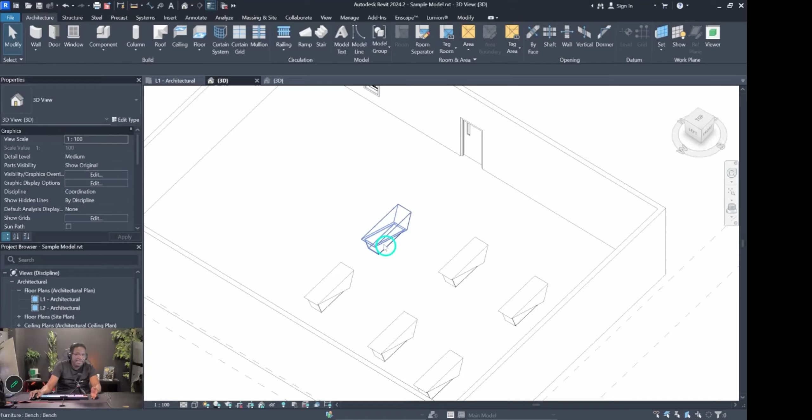But it can be a little tedious having to go into the family and edit it each time. Ideally, it would be great if I could just click on my object and go into my properties and just change the size. You can create that in your family editor, and this is how you do it.

So what I need to do is create a parameter called bench width, and that parameter will allow me to change the size of my bench without having to go back into the family editor, editing it, and go back into the project every time. So to do that, I'm back into my family editor.

I'm going to put this over here, and go to my top view. Now, the way parameters work in the family editor, they work based on your dimensions. So for example, I'm going to put a dimension here to here, one here to here, and one here to here. These are the dimensions between these reference lines.

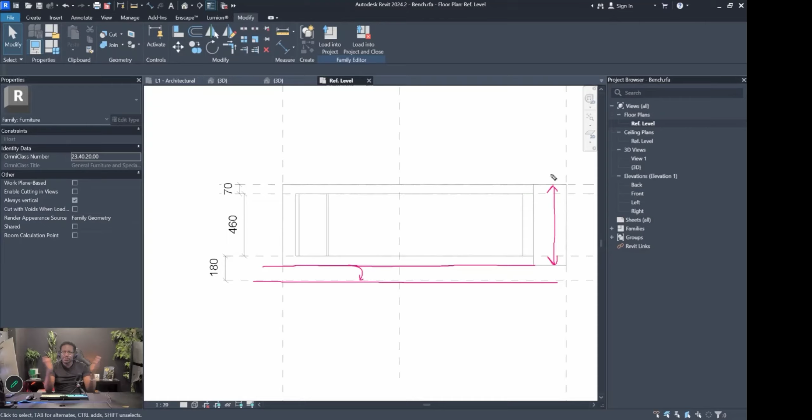What you'll notice is that if I move this reference line here, this dimension changes. So what I want to do for this to work is link this line to this plane. That way, when I move the plane, the line will move. This line is the edge of our bench. So once I move this reference line, it will move the edge of this bench, and then my bench will change. Let's see if we can do that.

So I'm going to undo that. The way that this works, let's make this bench a little like this—maybe a short way to do this. Then I'm going to make the bench shorter again, but I'm going to end it on this line.

Now here's the important part. I get this little lock here, and once I click that, the edge of the bench and my reference plane are now locked. So if I move my reference plane, the bench changes. You can look in my 3D view, it actually changes. Now, I'm not seeing my reference plane in my 3D view though—I can only adjust that here.

So that is step one. Step one is that I need to link the lines of my object to a reference plane, so when I move the reference plane, the lines of my object will move. That is step one.

So the great thing is, if I click on this line and type a dimension, say 100, and press enter, notice that my reference plane moves, and it also moves the edge of my object. Let me undo that.

So what I want to do is create a dimension line from here to here. If I click on this reference plane and type 1500, it will move the reference plane, and at the same time adjust my bench width as well. So now I have my dimension. Let me undo that. The idea is that all I need to do is edit this dimension, and my bench will get wider.

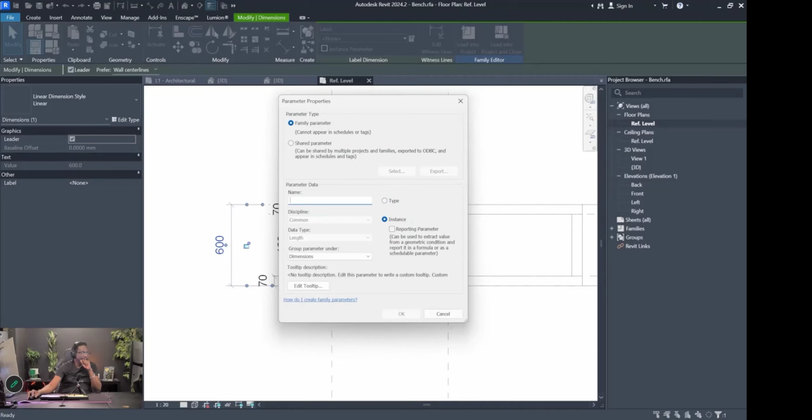So what I'm going to do is make this an instance parameter, and we will discuss the difference between instance and type in just a bit. We're going to call this width, bench width, and choose OK.

Now notice bench width equals 600, and this is how you know this is now a parameter. I'm going to load this into the project now and replace it. What will happen now is when you click on this bench, you will see a new parameter that says bench width 600. So now I can make this 800 and it will change just like that, which is really cool.

I can adjust this. So now I don't have to go back into the family editor to edit the bench, then save it and then load it. Now I can just change this parameter directly in the project, right? And that is how you create parameters.

Now, if you notice, when we created that parameter, we created it as an instance. Let me go back to the family editor here, and notice that I created this as an instance. How I can know is if I go to this button that says family types, this shows me a listing of all my parameters in this family.

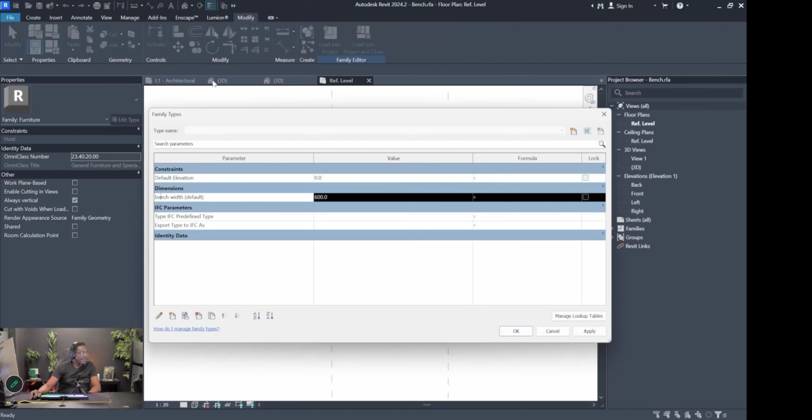So here is a parameter that I created, bench width 600, which is what I'm seeing here. And when I go into my project environment, I'm seeing that as an instance parameter.

Now what I'm going to do is go here to edit parameter, and this is where I can actually change things. For example, I can call it bench W. Choose OK, choose apply, choose OK. I can load it into my project and update it. Now when I click on my bench, it now says bench W.

Let me go back to my family editor. When I go to my properties, my family type editor, I can still edit my parameter. I can call it whatever, and I can choose where I want to group it. Notice it says the group is under dimensions. That means back in my project environment, if I click on this bench, it is grouped under a heading called dimensions. So all of these settings here control the parameter of my object.

Now, a while ago, we created the parameter as an instance. Now we're going to change it to a type, and watch carefully what happens when it's now a type. I'm going to choose OK and choose OK here.

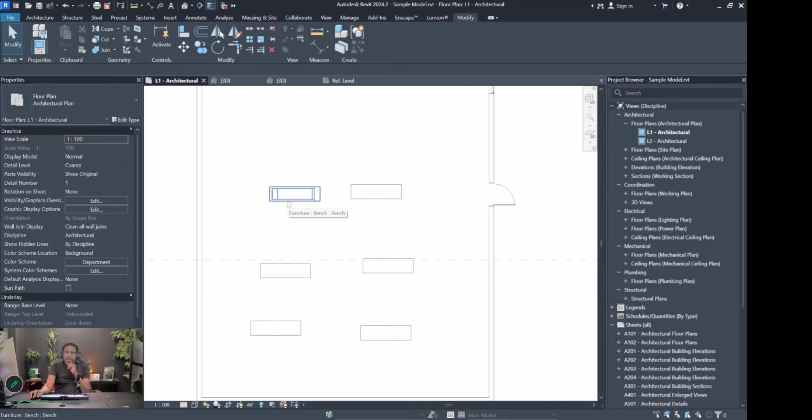Now I'm going to load it into the project again and replace it. When I click on my bench, I no longer get the option for changing the width in my properties. Instead, that option is now in my edit type.

Now, why would I want to put it in here versus out here? Well, the difference is when it's in edit type and I change it, say to 1000, and choose OK, all of these change. Versus if it was in my properties, only the one I have selected would change.

That might be good or bad depending, but usually when you create a parameter, you want to create it to be a type. Let me tell you why. Let's say I had two types of benches.

I had these benches down here, and I wanted the same bench up here, but with a different parameter. So I could copy a bench up here, then go into edit type and duplicate it.

I could call this bench new, and for bench new I want those to all be 900 millimeters. So I choose OK, and let's say I had a few copies here.

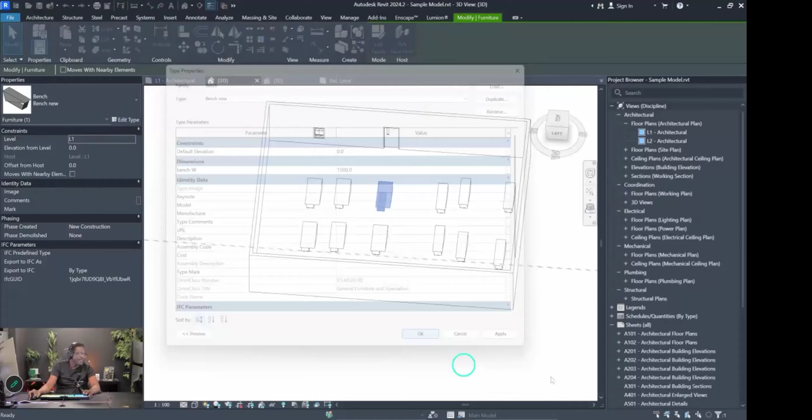The idea is that all of these benches here are my original bench, which I can still edit, and all of these here are a new type of bench called bench new. So if I change only bench new to 1500, only these will change. Now they're still the same bench object, but I've created two different family types.

When I move the parameter to be a type instead of an instance, that parameter becomes editable in edit type and not in the properties panel, which is more flexible. So you can choose how you want your object to be parametric by giving it parameters in the family editor, and you can add parameters anywhere.

For example, remember that door I showed you earlier, where I was able to go into the family type and change the width, height, and thickness of the door—all of these are parameters. If I go to edit family and look at the elevations, notice all these parameters set up where I can change the rough height, the height, and the strike height.

Notice these are not editable—the width of the window offset from the edge of the door—because they don't have the equal text or the label with them. So these will always remain stationary.

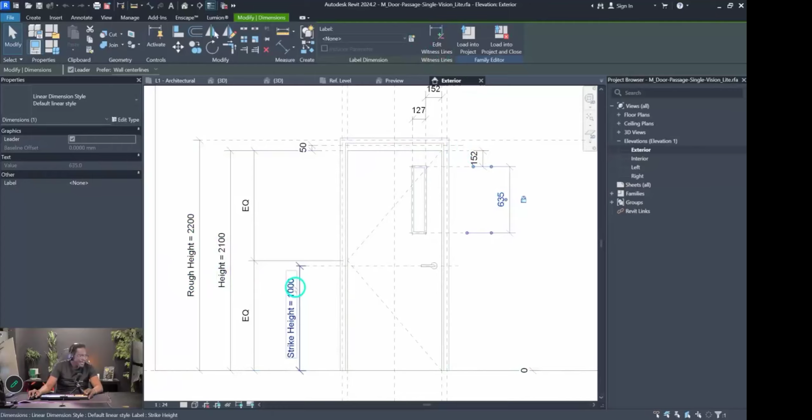However, these are editable. I could go into my family types and manipulate this. I could add a new parameter if I wanted to, one that maybe changes the height of this glass using the same method I used before, or I can open an existing family and modify it.

With this ability, you can create awesome families that are fully parametric and editable. You can create any object, but just ensure when you create it, you choose the right category to model your object in. For example, this is a door, so it was created using the family door template.

We created a piece of furniture, so that was created in the furniture template. You have to use the right template for the right object. Okay, that is how you use the family editor.

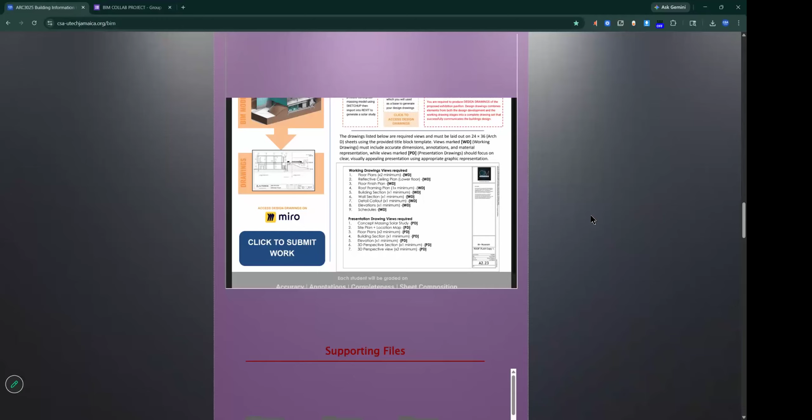When is this due? Let me see what I have here. This assignment is due... collaborative project is due on the 14th. Oh, meaning - not due on the 14th. I'm probably issuing it on the 14th. I didn't set a due date for it yet.

I didn't set a due date because I need to find out when your final crit is. You said your final crit is the 28th? Am I right? 27th? Right, so we're clear... actually, no, 29th. Yeah, we're clear of this because you'll have about 1 week to do this - literally a week, since you don't have to build much for this assignment. When we come back later we can tie up the due date, but I'm leaning towards the 20th, so you get one weekend to do it basically.

But you know exactly what the assignment is, and hopefully you agree with me that it's not a lot of work, guys. What do you say, Elandra? Is it a lot of work or not a lot of work, in your opinion? Is Elandra here?